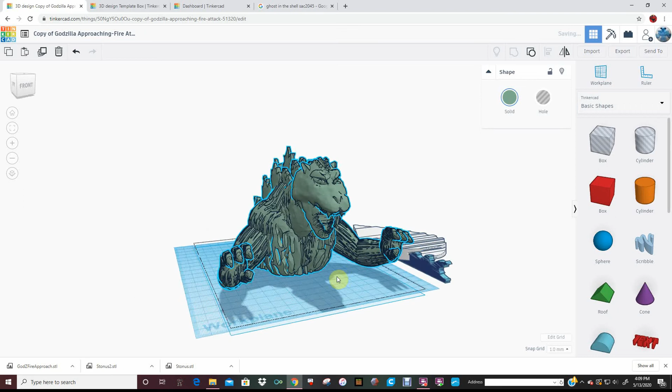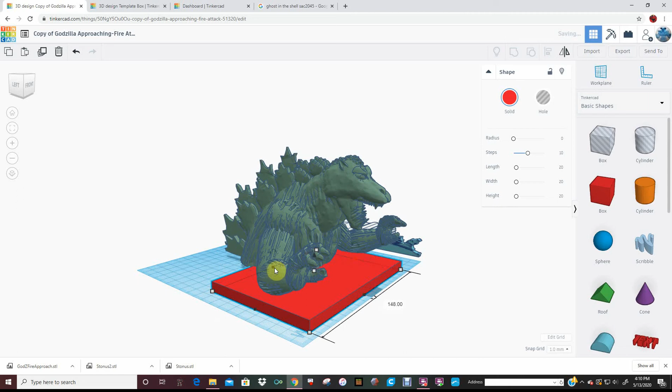If there's anything you want to make a base for, say this Godzilla, I wanted to make a bust of it so it looked like it was coming up out of the water. If I were going to be lazy, I would just take a square and make a base like that.

But for the sake of presentation, if you want to have a little more fun with it, I'm going to show you what I do. Just grab the Scribble tool and make a simple pattern to look like water. We want it to go like Godzilla's moving forward and pushing water, so we want it going from up to down, forward to back, sweeping downwards.

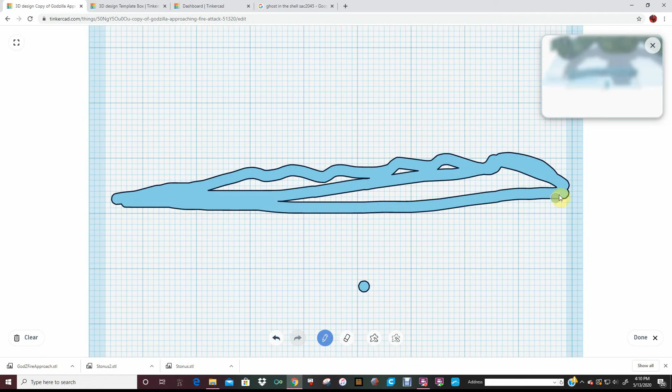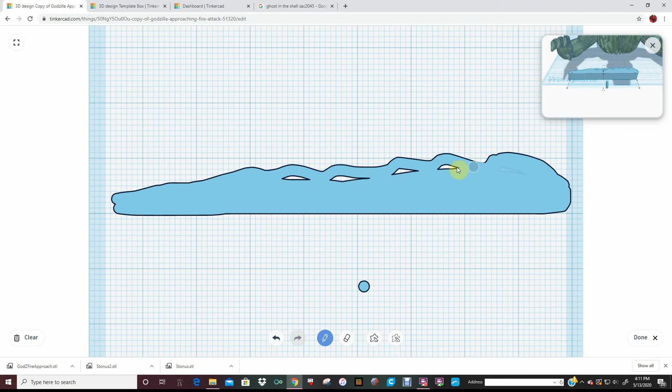I was looking on Twitter, and Tinkercad was talking about the Scribble tool. They wanted people to show things they use the Scribble tool for, so I'm doing this to show one way to use it.

Like I say, if you want to whip out a quick base for any sort of project, here we go. See how that got here.

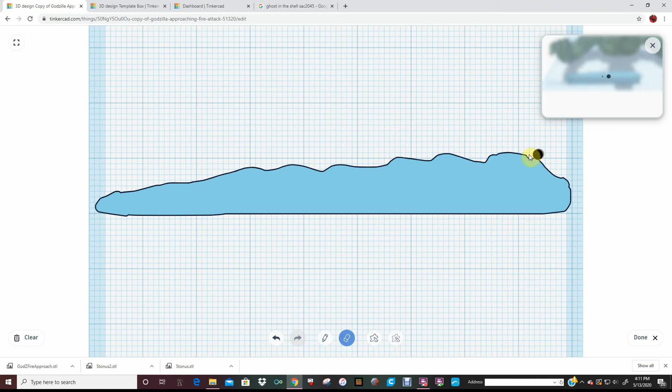So then let's tighten it up a little bit with the eraser part. You see how I just selected the eraser here? You make a couple quick cuts into it, because most of the stuff when you use the Scribble tool, it's very hard to get a sharp edge.

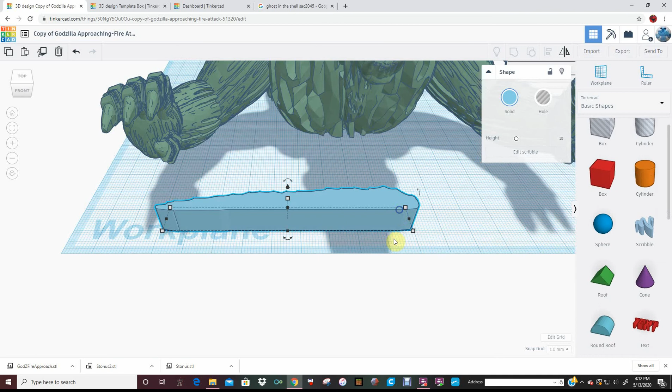And with waves we want them to look a little bit sharp, like that. Let's lengthen that a little bit, and then let's cut it. I always like to cut anything I make with the Scribble tool and give it a harder edge, because I want it to lay flat, as flat as possible on the work plane.

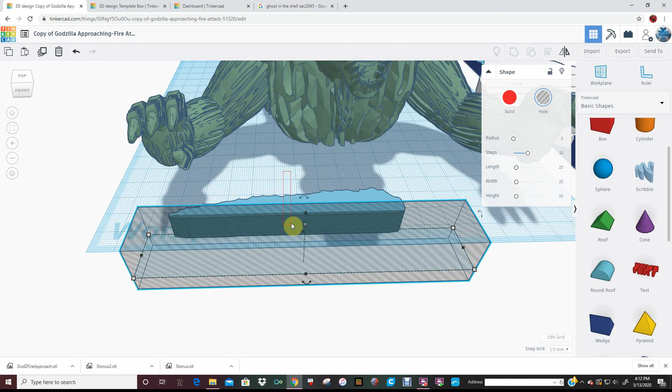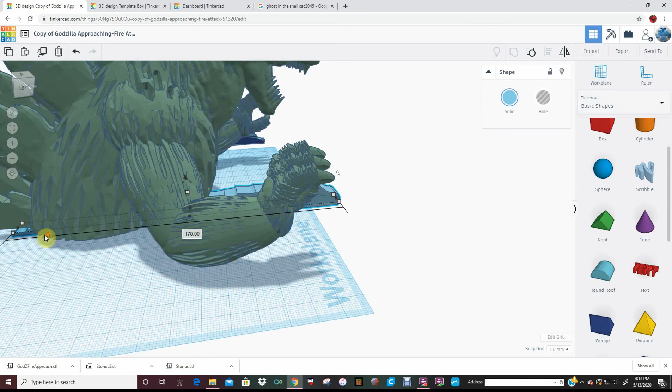So rotate it. Rotate it. Let's lengthen it. Let's expand it. And there it is.

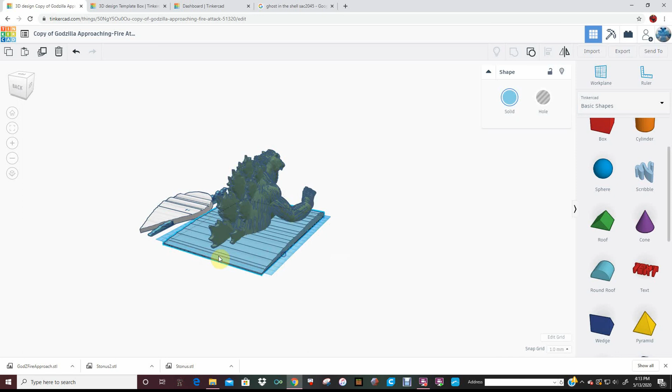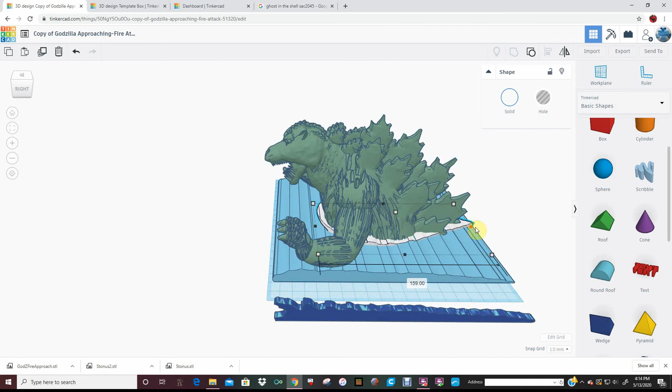Now, beforehand, I had made this with another pattern. It was just trying to make the wake of Godzilla within the waves, using the same technique. So it just adds a little bit more to it, a little bit more for the eye to look at.